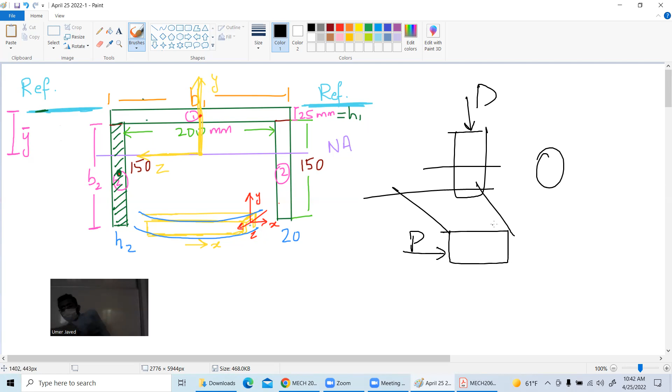So this object will, how will it bend if this is cantilever? Like that. Okay. Do you know the centroid of this?

But for an object like this, you have to find the centroid and neutral axis. So it's complicated. So simple problems are definitely coming for your midterm 1. A problem like this is not coming.

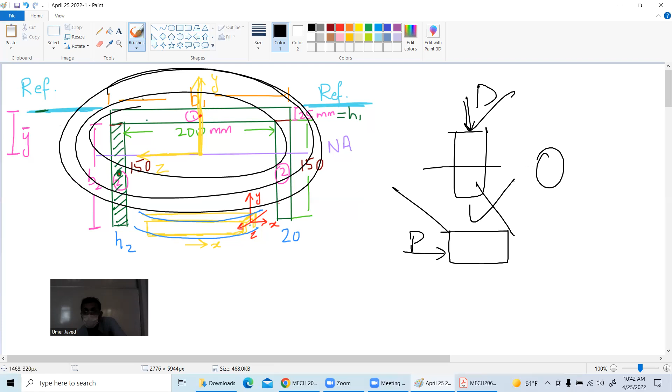A problem like this, I mean, this problem. These are definitely coming, of course. Let me put lots and lots of text, but problems like these are not coming. Okay.

Okay, do it. What is the number one step? The number one step is that you need to know in which direction the force is being applied. So let me tell you that the force is being applied in this direction. If the force is being applied in this direction, then what is the beam?

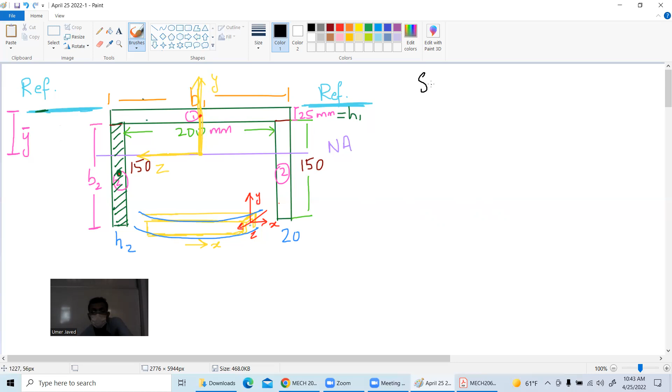Let's say this is your beam. Are you following me? And let's say this is a simply supported beam. So simply supported, doesn't matter simply supported or not, but I am trying to tell you if it's simply supported.

So let's say from the side view, you have an object like this. How will it bend? It will bend like this, correct? So please focus on this yellow structure, this little thing I have created. So if it is bending like this, the question says that for a moment of...

Hang on. The moment was given in the question, wasn't it? Yes, no? Moment is... that's bizarre. Anyways, let's say Mz is given.

I don't know the value right now. I will find it in my notes. So what is the number one step?

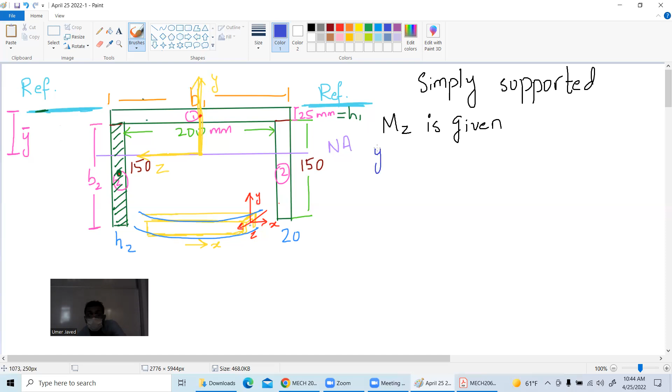Good. Number one step is find the neutral axis. But in order to find the neutral axis, it means that you have to find the centroid. So the formula of centroid is y bar equal to summation yi*Ai over summation Ai.

If you don't like this, you want to make this as a big rectangle and this as another rectangle and this as another big rectangle, you are allowed to do it. But I actually somehow made this as the big chunk and this as another chunk and this as another chunk.

So my first rectangle is this one. My second rectangle is this one and this one. Number one, number two. So first thing is yi, then I have Ai, then I have product of yi, Ai.

So now you can solve the question yourself. So for number one, it will be... I suppose in order to find this, I have to make a reference line, no?

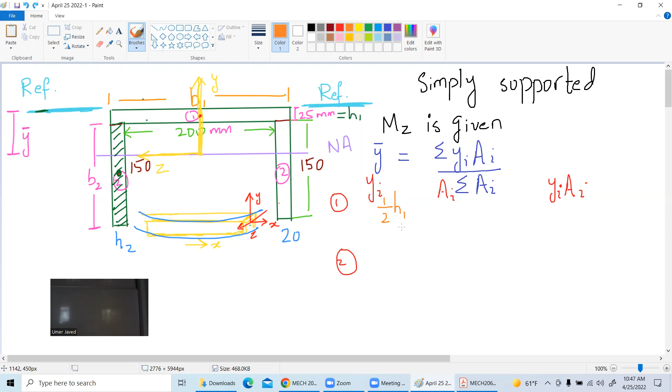No? Yes. Let me help you then. What is the yi for this rectangle?

It will be 1 over 2 b2, plus 1 over 2 b2 plus that h1, which will take it to the reference line, the blue line.

Okay, I think this is still new for everyone, so I have to do it first. It's not clear. Finding the centroid of these complicated structures, I think, was taught to you somewhere, but 1 over 2

b2 plus the reference line is how much distance apart? h1. Then ai is easy, it is b1 h1. And this is also easy, it is 2 b2 h2. And then yi ai, you will use the calculator yourself.

I'm definitely not doing it. Then you will use y bar equal to the formula and give me the answer in millimeters.

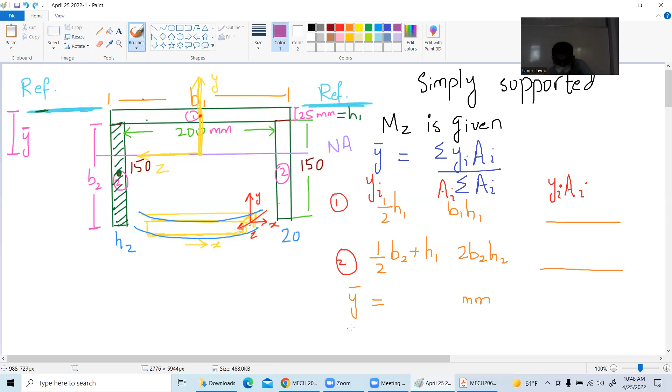And this centroid will be y bar from which line? The reference line that you have created. Now, last but not least, this means that the neutral axis passes through which line? The centroidal line that you have found.

So find it yourself. Then in the meantime, I will write the formula for students. Stress X is equal to minus mzy over iz.

And you have to find the iz, I suppose. So students who are getting confused by x's, this is y, this is z. This is y, this is z, and this is x. Okay, so in this way, you can find iz.

Let's make a rectangle. Is this even clear? Everyone, no? Yes. Really? Okay, so now you will find the I value.

How? Number one, number two, and it's a little hard, I suppose. This is IC. This is D. This is moment of inertia about the Z axis. That is your neutral axis.

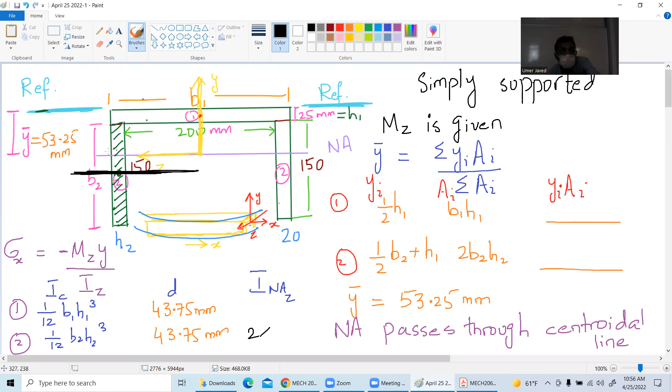It's confusing. Sir, can I ask something? What does D stand for? Parallel axis theorem - the distance of this rectangle's centroidal line to the centroidal line of the whole structure, the whole cross section, which is this line. So this little thing is the D.

Okay, what is the D for this rectangle? You can help me. What is the D for this rectangle? It will be the distance of its own centroidal line to this line, the purple line.

Okay, so we have 2 multiplied by 11.4 into 10 power 6. Nobody gave me the values. You got it? And this one is 11.8 into 10 power 6 in millimeter power 4, I'm sorry.

While calculating the second one's moment of inertia, we said IC, the B2 H2 cube. Which one is B2 and which one is H2? This is B2, this is H2. This is B1, this is H1. But while calculating the moment of inertia with respect to IZ, we need to do H times B2 cube, as I guess.

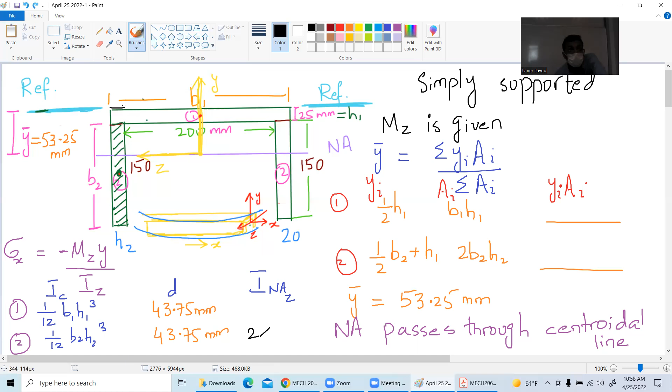Is that true? Because the Z is explained... is towards there. No, Y this is towards up. You're not getting my point. So if you see this whole thing is a beam like this, load is applied like this, and this beam will bend like this, right?

Look from here, this is your structure. So this thing will bend like this, no? Like this, right? So where is the Z? The Z is towards the left. So of course, the whole thing is curving like this, so I have to find IZ.

So finding the IZ, we are finding IZ is, I guess, H2 times B2 cube divided by 12. Oh, acha, okay, got it. Yes, thank you, very nice. Good, very good by the way. Thank you. I actually did not notice, I was very hurriedly, I put it like this. I appreciate it, thank you.

H2B. Excellent observation from him, by the way. I never thought that I had made a mistake. Sorry, it was in a hurry. I think I made a mistake. Of course, H2 B2 power, thank you.

Okay, so now that you have got this, you will put the values: 2 multiplied by 11.4 into 10 power 6, and this is 11.8 into 10 power 6. Okay, now last but not least, I will add those two chunks together. So I will have the summation as 34.6 into 10 power 6 millimeter power 4.

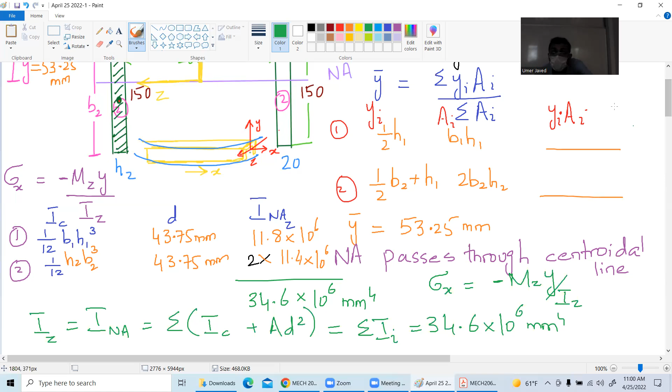How many agree? Okay, and last but not least, you will say stress is equal to minus MZ Y over IZ. You have got everything now. If you have to find the maximum stress, you can easily find it. So let me do the maximum stress for you. Unfortunately, I don't have space.

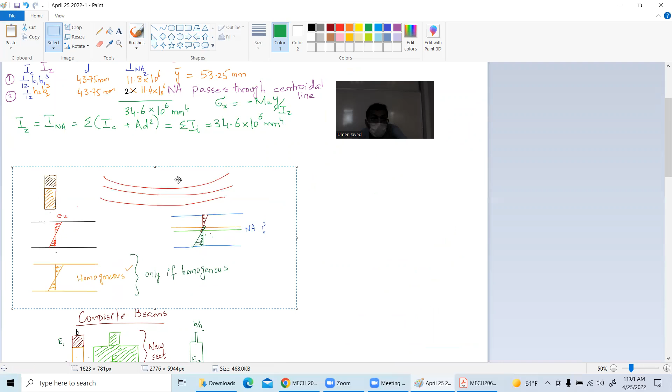That's not good. Okay, hang on with me. Is this clear or not? I thought it was clear. No, okay. Then last is stress X is equal to - I don't have the MZ value, I will give it to you - minus MZ. Okay, give me the maximum stress that the object can exhibit divided by IZ.

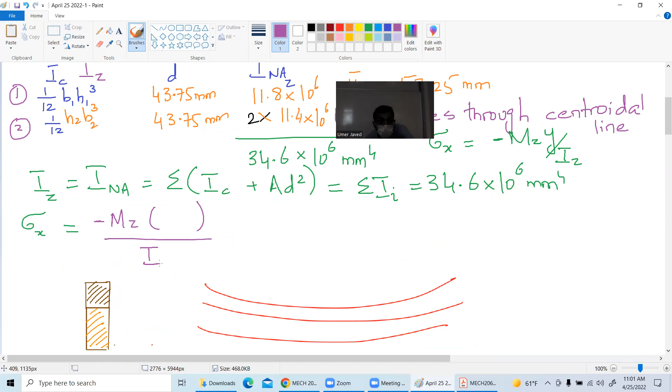Okay, so give me the Y value for maximum stress. This you can find, come on. 150 minus 53.7. Okay, he already found it. Let me answer his question. You answered, what was the value you gave? 150 minus 53.25, very good. So it's equal to 96.75.

Okay, I have for maximum tensile stress, negative 118.75. Let's do it together. How can you find the maximum tensile or maximum compressive stress? You have to go from the neutral axis line of the structure to the maximum distance.

53.25 is from there, so for my maximum compressive stress... not 53, I think it's 56. No, I think I wrote the wrong value. 56, I apologize, it's my mistake probably. 56 is the value I have in my notes. You have to double check as well. 56.25, and I will make a correction here, 56.25.

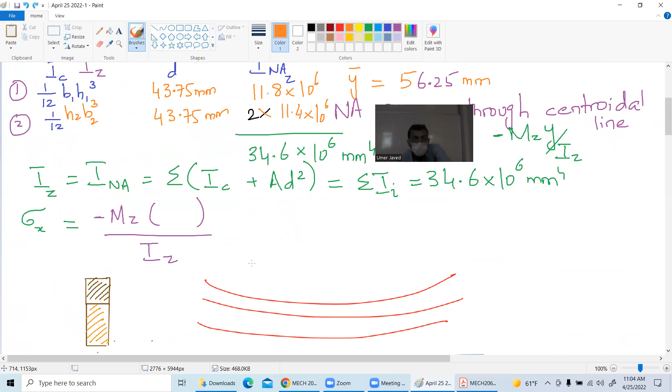We have a student who is doing it. 121.25. No. 118.75. No. Okay, I will tell you again. Do 175 minus 56.25. 118.75. Good, 118.

118.75, it's in the negative direction, right? Yeah. So, okay, we have a lot of students who did not understand this, by the way. I have a feeling. No? Yes.

So let me make a red line here, and let's say a light blue line. The question ends here. Okay.

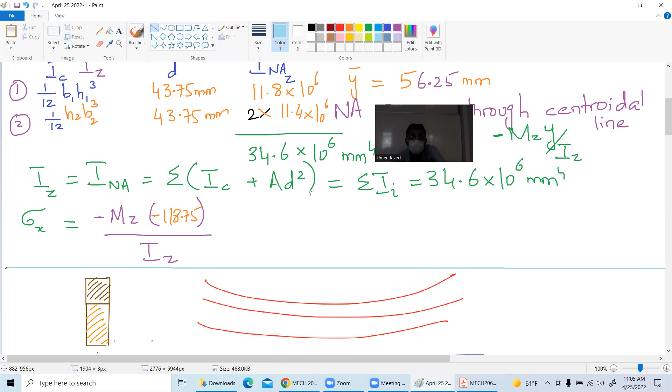We are stopping here for 5 minutes. Just tell me if it's clear or not. No, not clear. Confusing?

Let me answer this question, then your question. Yes. The y is confusing, by sigma x equals minus Mz times y divided by Iz. So the y value we found, what can we show, is it positive or negative? Depends on the example, the neutral axis.

No, purple line, this is my z and my y is pointed upward. So if from the neutral axis you are going up, from the purple line, if you're going up, which is 56.25 in the upward direction, so it will be positive, right? 56.25 is positive and your stress x comes out to be negative.

Negative, yes. But if you are going in the downward direction from the purple line, you will have a negative here and you will get a tensile stress on these edges. I will take your question.

Just give me one second. I was gonna ask the same question. Same question. Okay, look, this surface will be in tension, right?

Look at this, everyone, this one. This one. No, it's clear. Yes, no. Confusing? Is this because the force is being applied from the top? I have already explained this part.

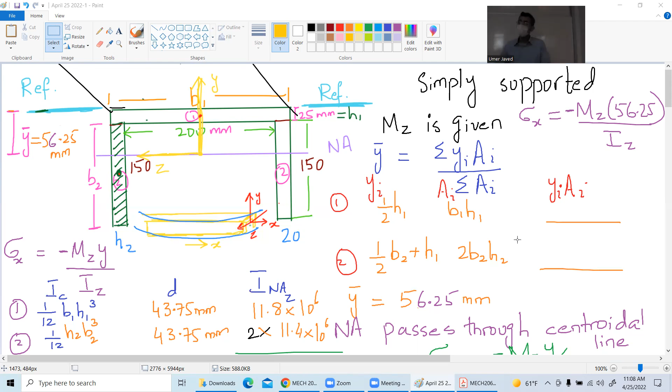I made a blue line at the top. If you don't like it, you can make a blue line right at the bottom, or you can come up with any other point for your reference line. Could be at the center, could be at an intermediate point. I made the reference line there because once I have the reference line, only then my y prime, y bar, I apologize, will make sense.

Y bar 56.25 millimeter. From where? From the blue line. Okay, on that note, let us proceed. Any questions?

Okay, now what happens is that, you know, the wood is really good in compression, right? But wood is not good in tension, right? So what happens is we will talk about what is known as composite beam.

Yes, please. Okay, that is if we have two different materials, two different structures that are glued together, and you are utilizing their properties. So for example, if wood is, what did I say, good in compression, not good in tension, it makes sense that if I use two different materials, glue them together and use the whole thing as a beam, then I can utilize their properties to my strength or to my benefit.

But the problem is that if you join two different materials together, it is very difficult to calculate the stresses. So right now I'll talk about this: if you have, let's say, aluminum or some other material joined together with another structure, and you're using both as one big beam. Now this is not a homogeneous structure.

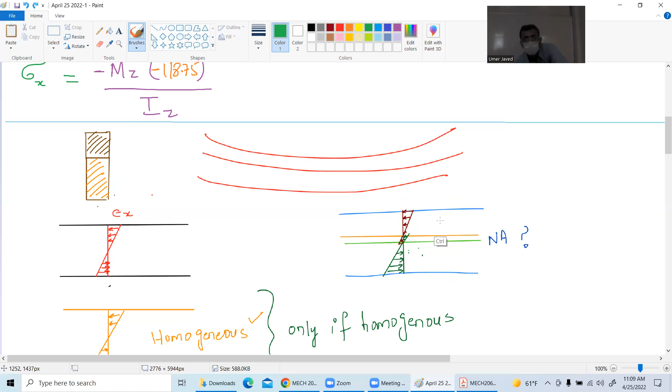So when you talk about bending stresses, it will be a little complicated, as you'll see in this diagram, which I'll explain later. So what is the strategy for composite beams? This is elastic modulus 1 of the top one, glued or joined together with the other one. In order to calculate the bending stresses, you will actually replace one of them with the other.

So let's say if the elastic modulus of the second one is greater than the first, and if I ask you to replace one with the other, you have to understand you are not physically replacing the whole thing with one. It's just mathematical. So let's say one student says, replace the one with the higher elastic modulus.

Let's say aluminum or steel, with the one with the lower elastic modulus. Then what will happen? You have to replace this one with the other, so you need greater material right here. That's why you can see I created a big rectangle here. So this will be my new section.

And there is another student who said, no, I don't agree with you. Replace the top one with the higher elastic modulus. So her approach will be, you have to reduce this top one because you are putting higher elastic modulus material. Again, this is hypothetical, this is mathematical.

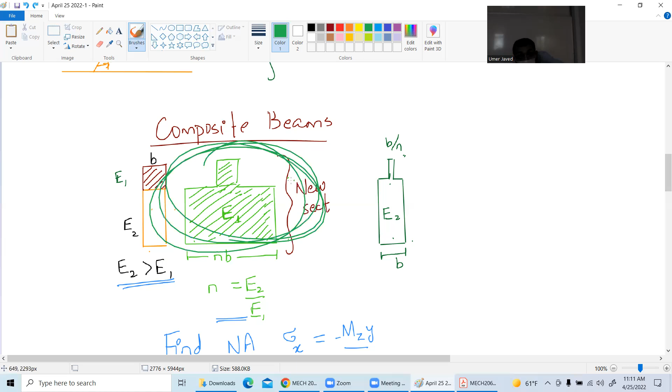N is equal to E2 over E1. Now for this new section, you will find your neutral axis, because you already are experts by now on how to calculate neutral axis for these sections. You can find the neutral axis for this new object and proceed.

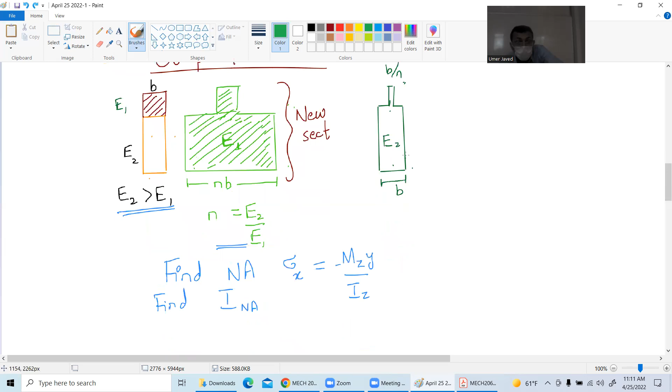Okay, so this will be the problem we are doing. Any questions?

Okay, write down the question. I already explained that this problem is not coming in your exam, this one. So you don't need to worry. What I mean is this is not coming in midterm exam 1. Surely it can appear in midterm 2 or final, but for midterm 1, I think it is too complicated for you.

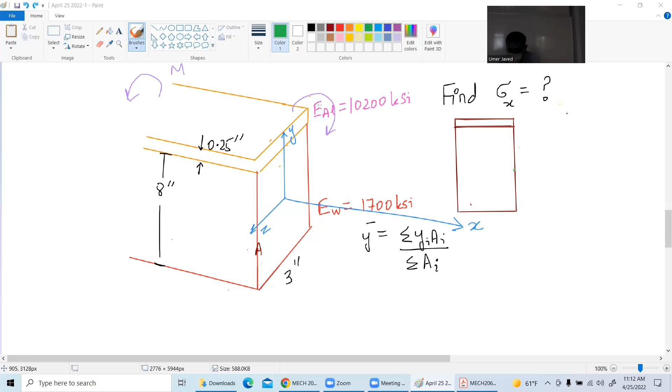So, yes, we are going to now figure the first - yeah, I will explain. So you have to replace one of them. Let's say, just so all of us are on the same page, otherwise all of us will be doing this problem differently, let's say we will replace this one.

Let's say we will replace the top one. Of course this is not up to scale, by the way, I cannot do it - it will be super big. And the bottom one remains as it is. There are other students who are about to do it differently, but let's for now do it together.

Do we have to stretch it? Yeah, this is a good question. I understand, can't we do it? Yeah, we don't - we won't go in that direction. I think the reason is probably because we are talking about bending on the z-axis. So when you are replacing, don't go in that direction. That's a good question, actually. Yeah, don't do that. But we can look into it as well, but we don't go in that direction.

Okay, on that note, why don't you help me? So this is your 3-inch... this is my width of - hang on, what is the width? Anyone? 8 inch. Height of 8 inch. So this height is 8 inches. If this is 3 inches, then this total width will be 6 multiplied by 3, right?

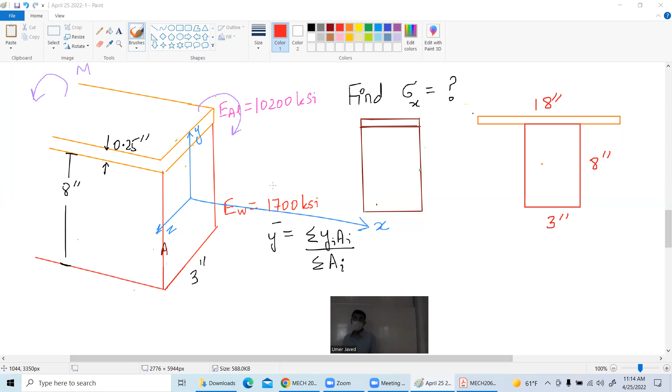Why don't you use a calculator and do this for me? 10,200 divided by 1,700 - does it come out to be 18? 6, sorry. So 6 multiplied by 3 is 18, okay?

Now that you have got this, let's do this new problem. So what will be your neutral axis? Your neutral axis for the new structure will be somewhere here, right? How many agree? How many disagree today? This is your neutral axis somewhere, probably, right? Probably, not sure, but probably.

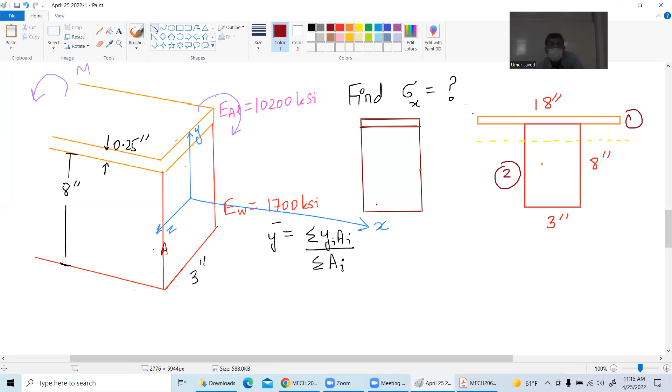Now this is your section 1, and this is my beautiful section 2. Okay, now give me the y bar. So in y bar, in order to calculate that, I have to come up with a reference line today. So this is my reference line. Now all of you need to calculate y bar.

You're not doing this problem - we are not proceeding if you don't give me the y bar. Y bar. Give it a shot, I'm going to do this after 6 seconds. Give it a shot. Y bar equal to, write down the formula for me. Y bar formula: summation of Yi Ai over summation Ai.

Y is equal to summation Y I A I over summation A I. It's about 3.6 inches away from the reference. It is 3.6.

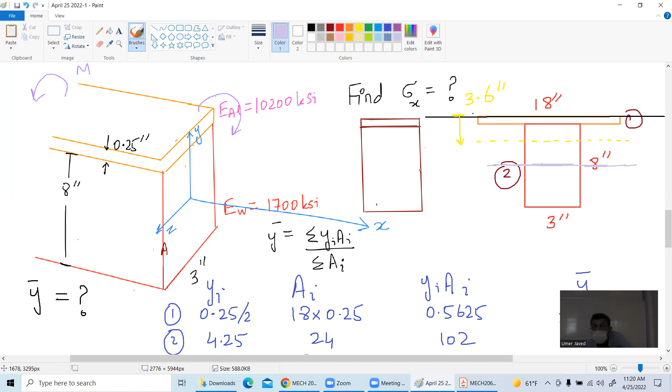3.5996 inches. If I have to go 3.6 inches from here, then the center of this fellow is sitting at how much? It is sitting at 4.25 inches from this end. So 4.25 minus 3.6 will give me 0.65.

You can see that I wrote 3 point... sorry, not from the top, I apologize. So if this is 0.125 from top, this means from the centroidal line to the center, I will do 4.25 minus 0.125.

Why don't you do this for me? 4.25 minus 0.125. 4.25 minus 0.125. And 4.125. Oh, 4.125. So why do we have 3.4734 here?

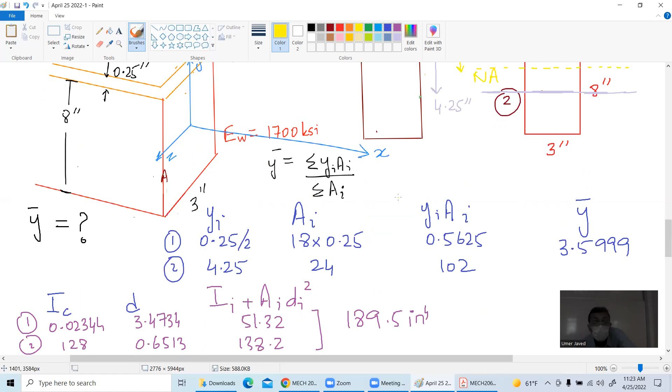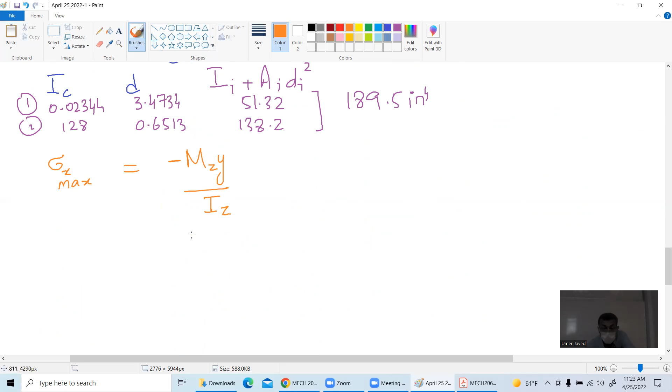Anyways, after doing all of this, you have to finish this by saying stress max is equal to minus Mzy over Iz. So minus, I will give you the moment, right now I don't remember, multiply by the distance from the neutral axis divided by the Iz, that is 189.5 inch to the fourth. So let's say I'm talking about the maximum, okay.

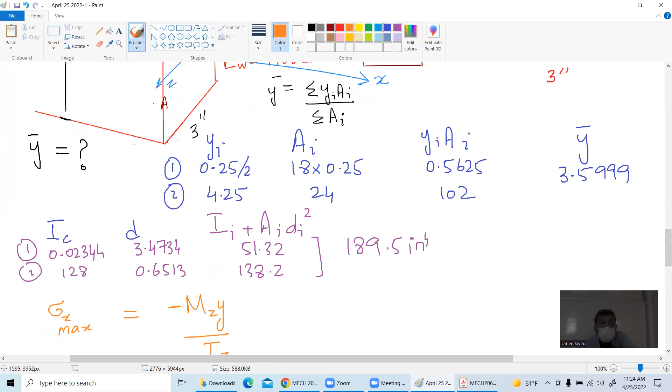So whatever this is, give me this is compressive or tensile, we will see. Similarly, okay, what are the two materials by the way? Did I tell you? No. One of them is wood and one of them is aluminum. So this one is the wood, this one is the...

Aluminum. And you can also see the direction of the moment, by the way, everyone. So the moment is like this, this means the force is acting from the bottom, this means that the moment is in negative direction. So the value of the moment is given to us as Mz equal to negative value of 60,000, it's given in the question, 60,000, pound inches.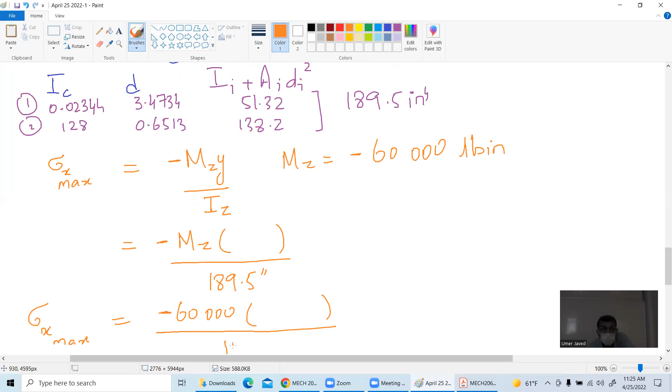So it is equal to minus 60,000 multiplied by whatever this distance is, which we have to figure out. You have to give me the maximum value, so give me the maximum compressive stress. You will do it yourself. Now, after finding this distance, give me the maximum stress in the aluminum.

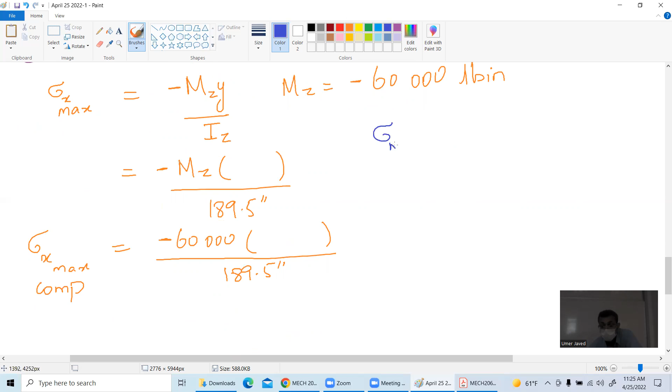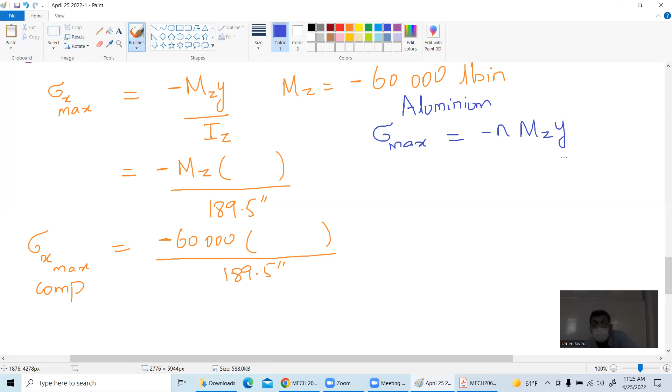Aluminum. So we have maximum stress in the aluminum is negative N times, because we replaced one of them, right? So which one did we replace? I think we replaced the aluminum with the wood, right? So since we have replaced aluminum with the wood, I have to multiply the aluminum with the N divided by IZ,

which is equal to N was 6 if you remember. MZ is 60,000. By the way, in an exam setting, most students forget this N. Multiply by the Y that you have to tell me divided by IZ. So give me the maximum stress in the aluminum. Now, if it's bending like this, then the aluminum will have maximum tensile stress and the wood will have maximum compressive stress, right?

Okay, so give me the value of Y for maximum tensile and maximum compressive. So where is my neutral axis? My neutral axis is this one, so it is 3.6 inches from the top.

So for finding the maximum tensile stress on the top surface, I will put a 3.599, that is 6. 3.5999. And here I will put, I suppose, a negative value.

So I will go from this yellow line all the way up to the bottom. Okay, that is confusing. 4.25 plus 4 will bring me here, that this is 8.25. 8.25 minus 3.6 will give me the distance from the neutral axis to the bottom. So 8.25 minus 3.6.

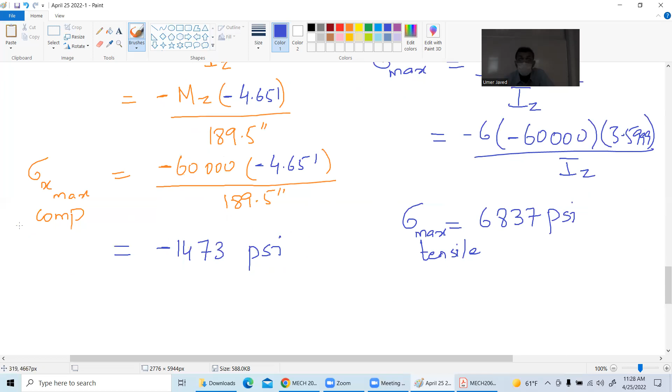Hocam, it should be minus 60,000, huh? For the compressed version. Because MZ is minus in that direction. Also, we have minus in the formula. So I put a minus and a minus. Right? Yeah, if you calculate, we will get positive, but we put a minus in the blue written part.

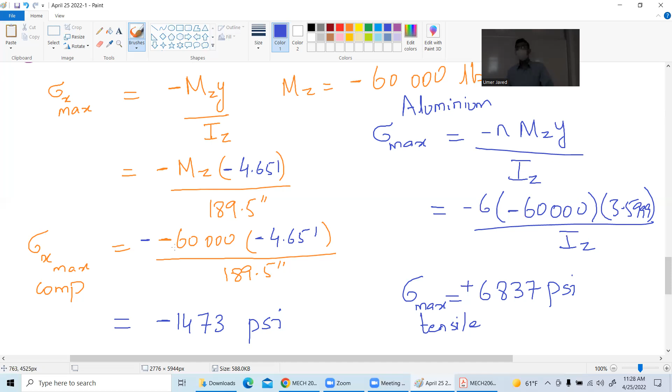Yeah, this one. Yeah, the whole thing. Oh yeah, this one, good. Acha, acha, minus MZ, so minus. Acha, minus, huh, good. Okay, you are confused about the moment direction.

So you can see here, there's two moments. Like, no, there is one. There is a moment. There is a moment. There is a moment, both in the same direction.

No, you see, look at this hand and look at this hand. So it's like this, right? Okay, so it's just a way of expressing it. How is it minus? That's the thing I don't understand. Because right hand rule, curl the fingers, it's in the positive z direction.

No, so it's in the negative z. This, you see this one? Oh, you mean, okay, it's viewed from like the side. Of course you have to see it like this. That's what I was confused about.

For finding the moment, like in opposite order, found the moment in this part. No, you're trying to find, I mean, this arrow? Forget about it. You have to just curl the fingers of the right hand. Why are you looking at that one? Yeah, if you do the right hand rule, it will be in the z direction. For that one?

If you are bending it like this, do I even care about my left hand? No, you're just looking at... For sure, I'm just doing like this. Hocam, you know I will forget, I will answer. You have to understand these things.

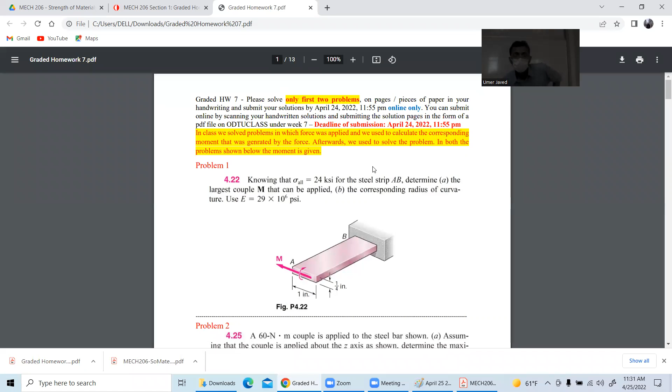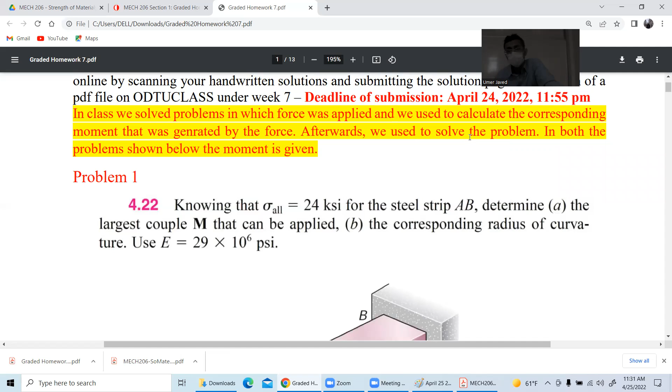Look, please read this. In class, we solved problems in which force was applied, and we used to calculate the corresponding moment that was generated by the force. Afterwards, we used to solve the problem. In both the problems shown below, the moment is given.

Look, now M is written. Please focus here. Force is not applied towards the left, it's applied from the bottom. The beam is actually bending like this, that's why the moment is in that direction. Look at this arrow, this one, do you see this? This means someone has put the force from the bottom and the whole thing is curling like that. So most of the problems I've done in class before, I intentionally put arrows of forces so you have a physical understanding.

But in your textbook, the guy gives you the direction of M with a little curly arrow so you can imagine how the force is acting. Yeah, your question. Okay.

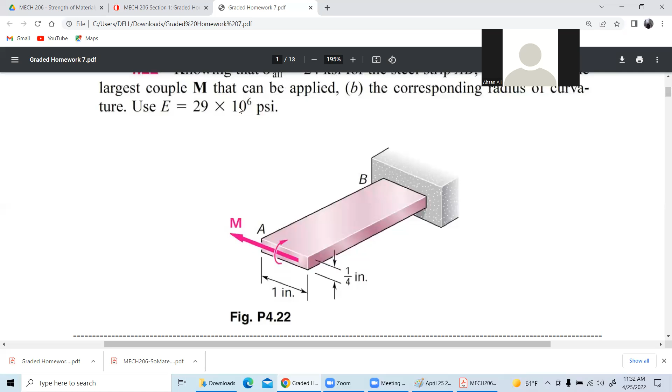This question, we found the sigma aluminum max and found that it looks like 3.6, right? 3.6. I'm finding, yeah, we did the calculation about the sigma aluminum maximum. While we find the sigma aluminum maximum, why do we take this 3.6 here?

Yeah, because the aluminum is the top one and the wood is the bottom one. So if I have to find the maximum stress of aluminum, I will go maximum distance to the aluminum surface from the neutral axis. And the top surface of aluminum is 3.6 inches from the neutral axis.

But also the stress, the found stress will give the whole part, as I guess, like we found sigma max aluminum, this part, like not aluminum, also we put in the wood. Exactly. So that's why at the end I had to multiply with the 6, because I've been talking about aluminum and wood all the time. How can I say that this is aluminum? So I multiplied it with a 6.

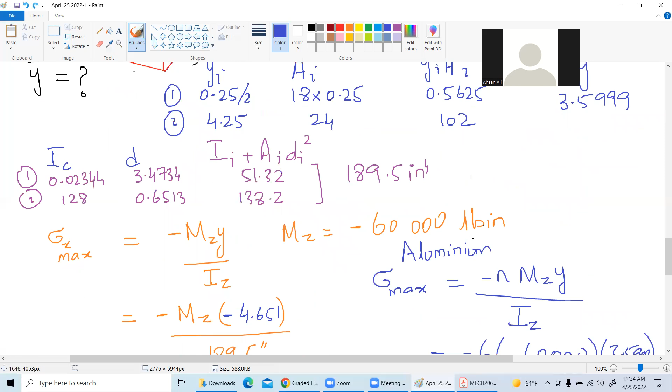Okay, so why is it 18? Yeah, because the 3 inches is the width, but I multiplied it with a 6 because 6 is the ratio of the elastic modulus of aluminum to the elastic modulus of the wood. So if I'm removing the heavier material and putting a lighter material in its place, you have to compensate for that fact, so you put 6 times more of the lighter material.

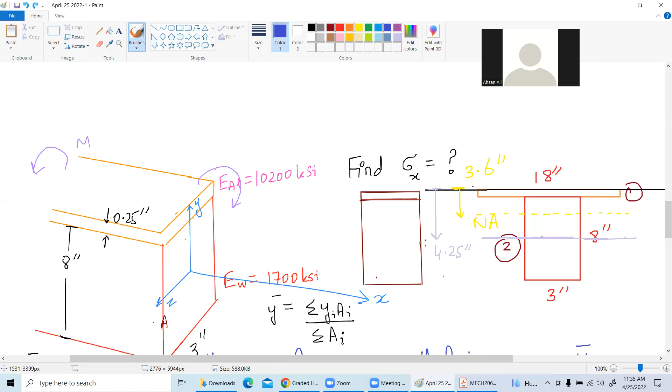So we found sigma aluminum right now. Hang on, yeah. So when I'm saying I have to find sigma max on the top surface, you have to stop me and say multiply it with the 6, because right now, as we speak, it's wood all over the place. That's why it's in that whole chunk, so I multiply it with a 6.

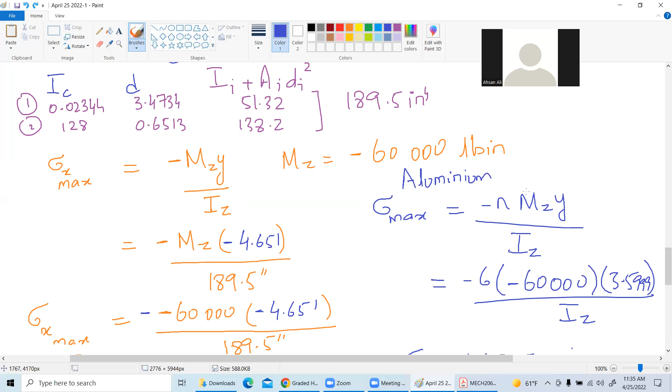Okay, and if I had replaced this wood with aluminum, making it inverse, then it's 1 over n. Good, good. So you have to look into an example from the book, because it's pretty much like that - for the other case you will have to divide with n.

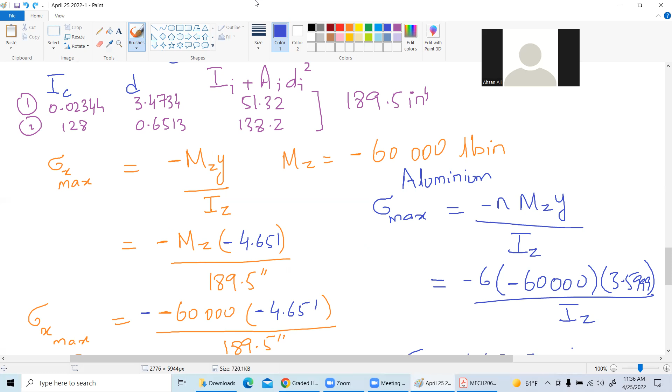So here, how do we find, why did we use 4.651 for the maximum compressive? Because 4.651 is the distance. If you go from this neutral axis all the way to the bottom, the total distance is, this is 8.25 minus this one will give me. We said this is the compressive distance.